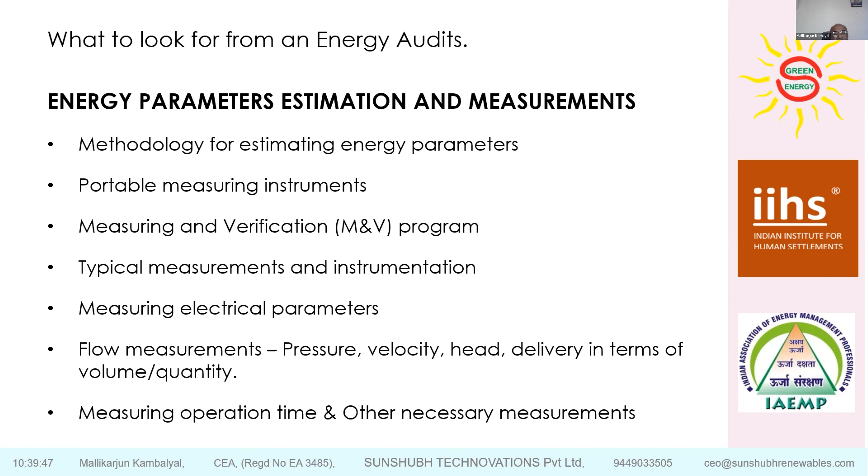Even if they are working, the supply line is throttled to divert water to different areas in the rural distribution system. Because if you are pumping water from a reservoir, there could be 10 villages, or even 2 or 3, wherever the number of villages in the line are. So invariably the pump curves would vary a lot based on the head, based on the quantum of water being drawn, and the size of the pipe laid in the system.

Now, what I'm talking about is mostly known to all of you.

But what I would now be focusing on is the way we present our findings. We need to identify various leakages in the pumping system. We need to understand the energy balance - the amount of power drawn, the amount of energy utilized compared to the work done by the pumping system.

Work done by the pumping system will obviously be liters per hour or liters per day. Or if you measure parameters like the velocity with which water is flowing, or the pressure - those parameters would invariably be converted into energy equivalent, to understand whether the system is working fine or not.

And to do this, we would mostly be using a pictorial representation, which we call a Sankey diagram. This particular diagram would identify what is the input power, what is the delivery, and where all the losses are going to be in the entire pumping system.

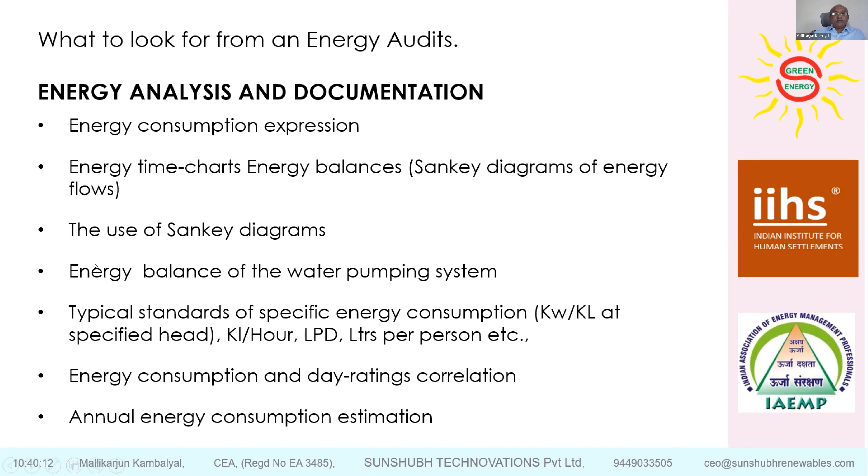If there are 10 villages, then at a particular village there could be a different kilowatt per 1,000 liters of water pumped. For some other village it could be different, because it is again defined based on the head, the elevation, and other parameters. So these significant basic parameters need to be discussed in detail.

Now, what is it that we need to be looking for? Usually people think that once you do an energy audit, it is done and dusted. No - what is important is that energy audits need to be carried out on a periodical basis, on a year basis.

It is not with the intention of, again, finding faults. It is with the intention of making sure that your pumps are working to the rated parameters.

It is also important, when we consume water, that the impact on environment plays a very important role when we do this energy audit. Probably people in hilly areas would understand much better, because during rainy days everyone has surplus water, and during summer, non-rainy days, they find a lot of difficulty fetching water, even a bucket or so.

So this has a direct impact. Considering all these parameters, it is important that we draw impact assessment on the environment from the water pumping mechanisms that we have adopted.

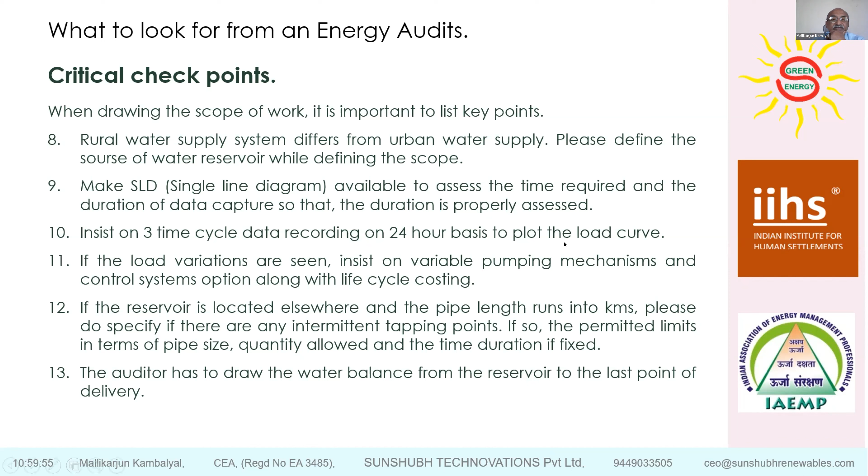It is important that the utility asks for the methodology that would be adopted in evaluating a rural water supply mechanism. It is very rare that people ask for the methodologies that each energy auditor applies. Now, this is quite important because this decides the net cost incurred by the energy auditor in conducting the energy audit assignment assigned to him.

Because in today's context, since we do not supply any material, it is intellectual property that is being extended. So some would fix their price at say around 10,000 or 1 lakh, while another might say it is going to cost 10 lakh rupees. In such a scenario, it is very difficult for authorities like you to draw a definite line as to how and what could be the best energy auditor whom you can select.

So the methodology that each energy auditor would like to execute should define the costing and the expertise that he has. There could be some parameters you have probably not heard of, but when he draws the methodology, you will know these are the things that are quite important for us to understand, and also the duration of the data that is being captured.

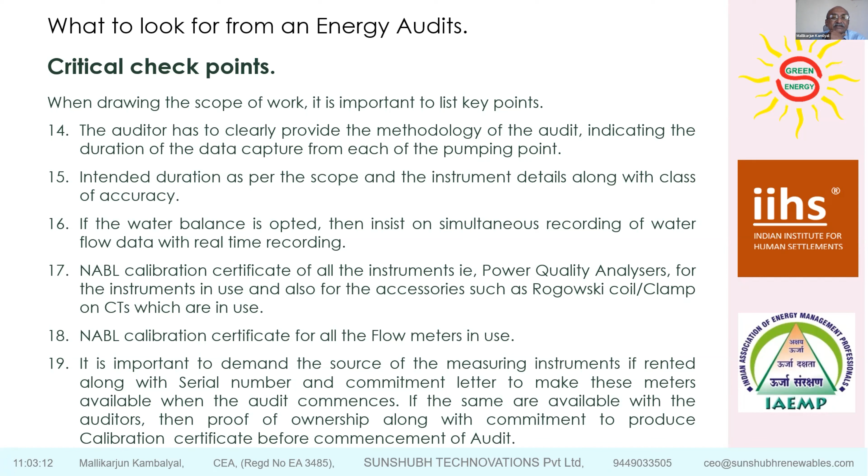Having discussed what one needs to look for in energy audits, it is also important to consider what parameters would be required to be considered by an energy auditor. Unless we define them, usually these parameters would be neglected.

When you see this, if you were to pump the water from this particular source, it is very difficult because the pumping parameters would change a lot. It would change because most of the impellers or the foot valve would get choked - and this is still seen today when it comes to pumping water.

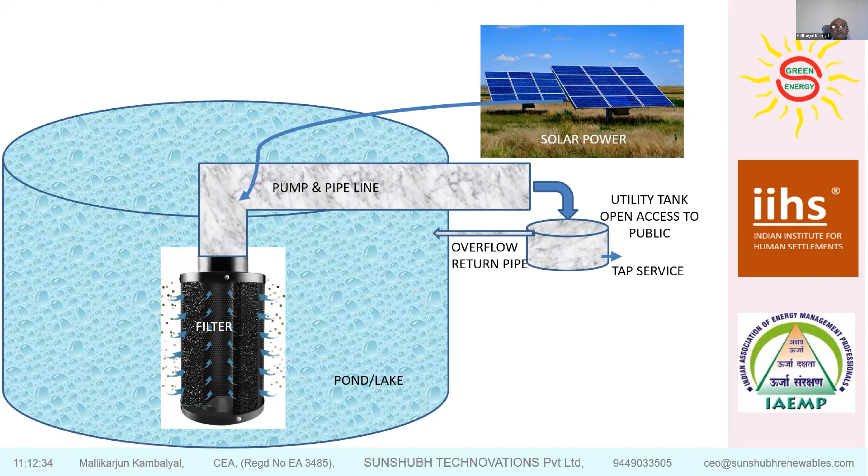And if there is excess flow, if the tank is overflowing, the return path can be given back to the pond so the water doesn't get lost or wasted. This way you make sure all the dirt and filth spit on the road doesn't enter the pond. Many people take baths there, and in many cases the same water is being pumped because there is no other alternative source in rural areas.

Another aspect is sulfur, which has been creating a lot of problems for the public and civilians, and as a result the health department is struggling to control it. This is very difficult, mostly because rural water supply mechanisms are spread out - they don't have a centralized water supply reservoir. So the best way is...

Probably people have seen water hyacinth - it's some sort of a weed where Northeast people have seen it in plenty. The backwater lakes also will have this.

This water hyacinth is one plant which can be built. You can have a pond at the point of its opening or at the mouth, and the water that flows through the water hyacinth plant is known to purify the water and reduce the load on the water purification plant.

Just to give you an example, the initial reading of the water's H2S content was known to be around 1700 units. After 24 hours, when the water was passed through the water hyacinth plant, it came to around 884 units. When it flows over to the next pond with a different set of hyacinth plants, it got reduced to 680. Third day, it was 630. Fourth day, it was around 622.

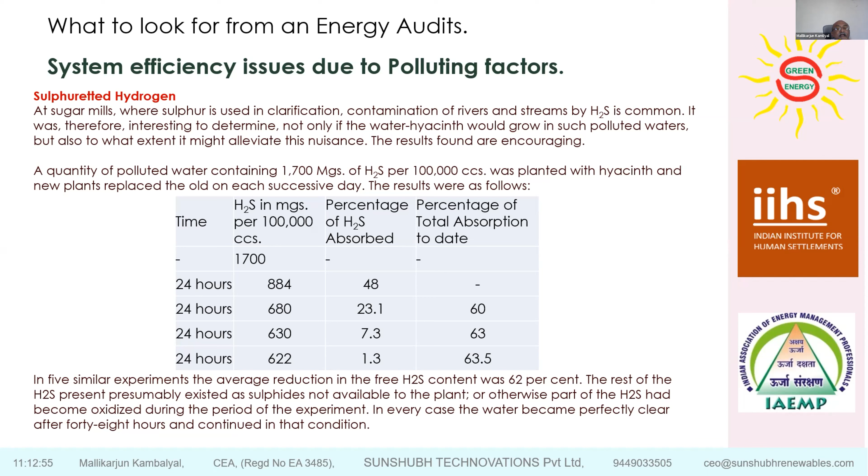Now, there is another mechanism. This, in fact, I had designed way back in 2005, and it is being widely practiced by our Southwestern Railway Zone people.

I have also mentioned it's just a small point.

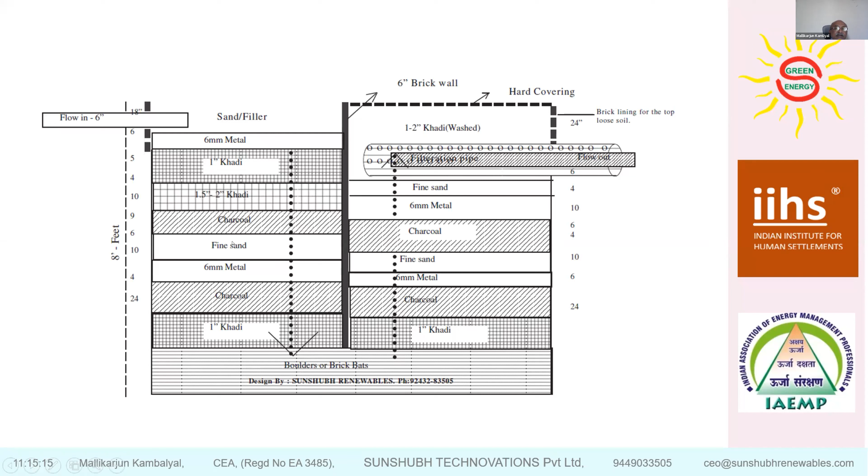Hello, yeah. Sorry sir, I think that was a disturbance. You can continue. Okay, okay.

So there are various issues. Good morning, sorry sir, excuse me. Good morning sir, yes, so myself Namit Ramola, sir, from Uttarakhand, a superintendent engineer.

Yes sir, Dehradun sir. Sir, I just want to know, sir, can we raise our query during this presentation or just after it gets completed? No, if you have, I have no problem, either way it is for the organizers to decide. I'm open for both, ask sir, you can ask in between. No issues, if there is a conversation or discussion, it is good only, you can ask any doubts or questions.

Yes, okay, first sir, actually I have just joined 5 minutes ago, sir, because I am serving election duty also, sir, in Uttarakhand, and in our state election polling counting duty I have been appointed. So I have just a query, sir, because it is a very interesting topic, sir, regarding this energy efficiency, sir. In our Dehradun district, we have lots of tube-well-based schemes, sir, in rural areas. Okay, so I have a query, sir.

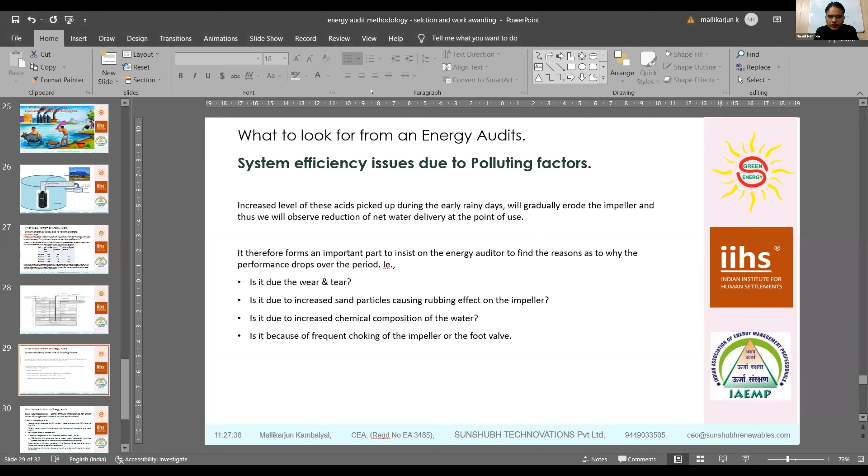Should I repeat my question, sir? Yeah, you can repeat, I'm not sure whether I'm able to share my screen here. Your screen is visible, sir. Yes sir, tell me. So my point is only, what will be the appropriate method to capture this rainwater, to percolate it to the ground, to the borewell points? Okay sir, I got what you wanted.

Now like I said, maybe the organizers can arrange a separate session, because this is going to be a detailed discussion - it has various parameters about pollutants coming from various sources. The cigarette butts would be having a different element, human spitting has got different parameters to be considered.

Bird sittings will have different parameters to be considered. So what I suggest is, yes, the point is very important when we consider for this particular thing, but maybe the organizers can consider having a separate session on this, and I'm open for it. Maybe after this, if time permits, we can take it up as a continued session.

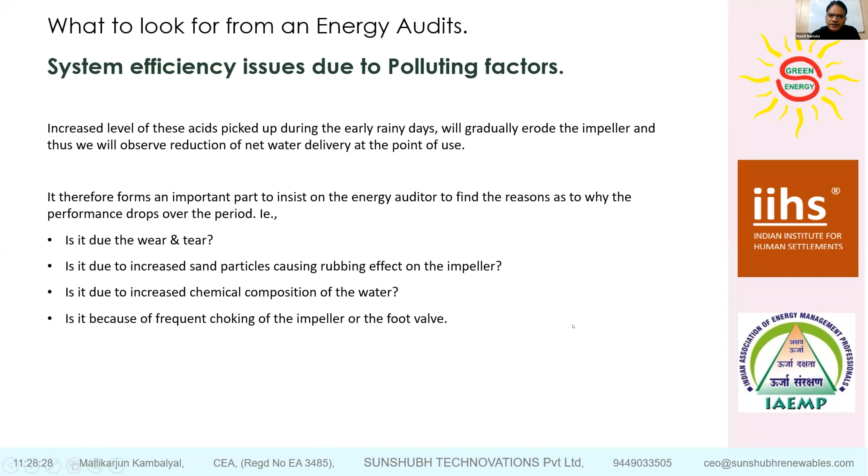Right, sir. I will request to organizers, sir, that one session regarding this borewell point of view, what will be the right appropriate technology, and the major parameters which we have to look at, like sir has told, if possible please make us a session for that, sir.

And I will also request that the session should show the PPT in a diagrammatic way, so that we can understand very easily what type of filtration we should use, because I have worked in rainwater harvesting for more than 15 years, sir. But what I found, it was not that much effective till date in increasing the groundwater table. But this is very important for our state and other states also, sir. So this is my request.

Sure sir, so we will go ahead. Yes madam, one minute sir for his point. Sir is totally asking about recharge, what parameters to consider from the pollution aspect. This session is mainly on energy conservation and pumps, motors and everything. So that session will be different altogether. Recharge parameter consideration, what particulars need to be done.

We will connect you to Mr. Mallikarjun. You can have an offline contact with him so that will be better. Otherwise we also have rainwater harvesting experts. We can share the numbers, sir. Because we are only focusing on energy and what is to be considered without affecting any pipeline designs and everything. So you are totally asking about recharge structures and everything, so we will connect you.